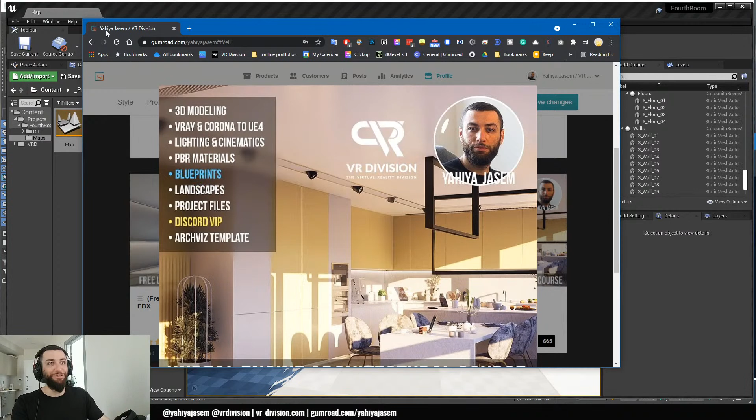Now that's it, let's close this and let's do our awesome stuff today. Thank you, Madizine, I appreciate you, all of you guys. Welcome, welcome Habibi, so let's get started.

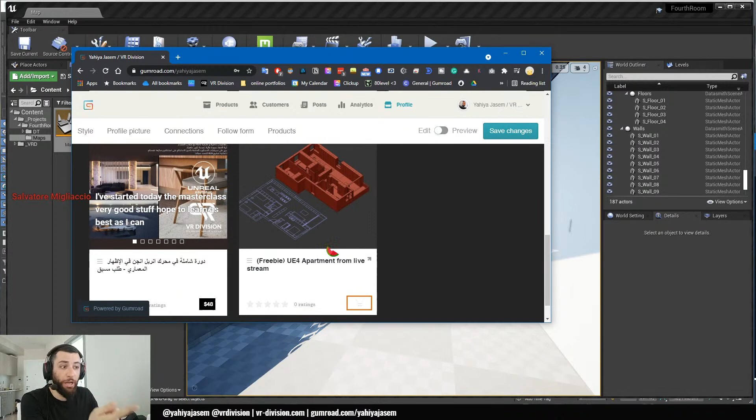Alright, once you download it, let's go back here. Once you download it, you will be welcomed with this. I deleted everything to make it a super small project file so we can get started.

Ray tracing is enabled because we're going to use the GPU Lightmass now. However, I would like to turn off all the ray tracing features in my viewport. To do that, click on the tilde key and type r.raytracing.forceall, force all ray tracing effects - you don't have to write all of it, just use your arrow keys and it will help autocomplete. So type ray tracing dot force all ray tracing effects, space, 0, hit enter, and now we've turned off all the ray tracing features in the viewport.

It would be much better to build the light this way, and actually I think Epic recommends that we turn off all the ray tracing features when we use the GPU Lightmass. Now when you click here next to build, you will find the GPU Lightmass, and it's enabled by default. You should have an RTX enabled card or something similar.

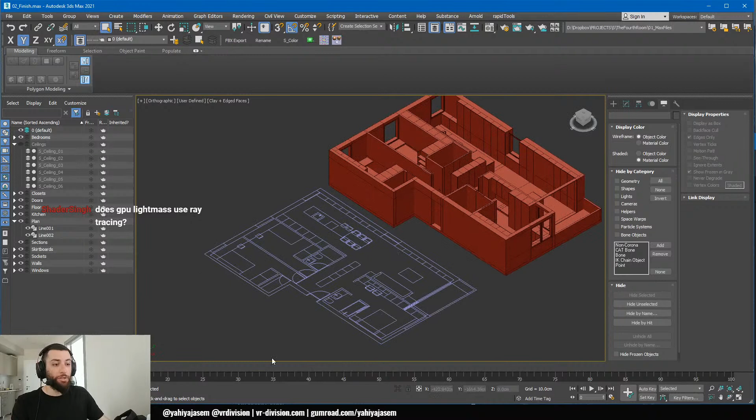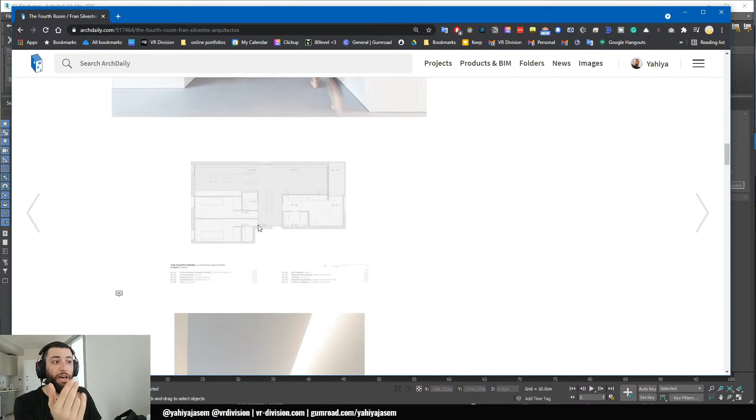T.S. John, what software do you use to make the house models? I use 3ds Max. Looking at the reference pictures on Archdaily, the way I started this project, I found this lovely apartment that I immediately fell in love with. As you can see, it's so beautiful here. Archdaily, one of my favorite features about it, is the pictures they provide, and if you're lucky, in 99% of the projects there are also the floor plans.

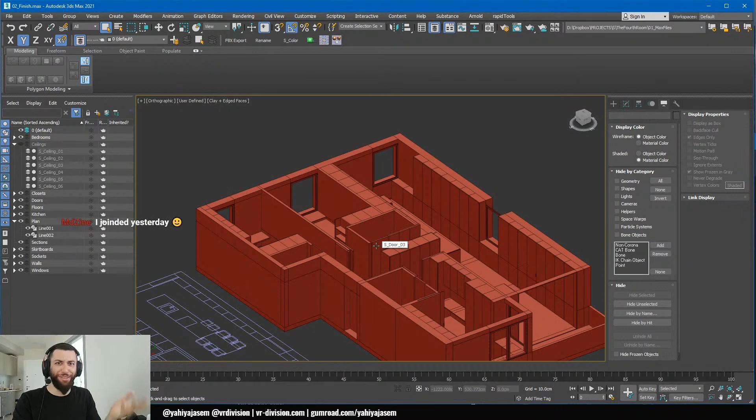Zahi from the team, he's an AutoCAD expert. I told him, hey Zahi, could you please do the drawings for me? He did, and then here we are. So I use 3ds Max mainly. I started learning Blender recently, well, it's been a year now, but mainly 3ds Max. But you can use any software you like, because there is an FBX file I provided as well if you'd like to edit anything.

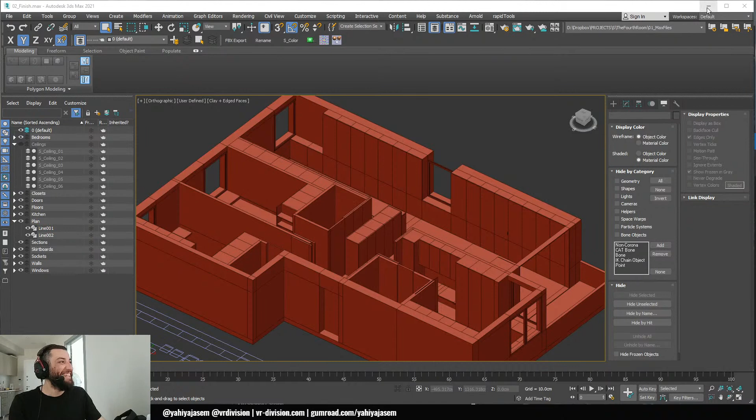Kishitij, yeah, I need to practice my pronunciation more, but as they say in Turkish, yavaş yavaş, step by step, or stuff like that. Or as we say in Arabic, shway shway.

When I start any 3D project, while I'm doing the 3D modeling, I spend really good time looking at all the reference pictures provided to understand what's going on, especially on personal projects, because I have more time to play with, you know, it's fun. I love this. So I make a mood board using a software called PureRef. Go to pureref.com, go get it, amazing little piece of software. I like to disconnect the internet and look at everything here.

Once we finished the 3D modeling, I exported everything with Datasmith to Unreal Engine, and in Unreal Engine, where you at? Unreal, wow, look at that, so many windows. Let's close some stuff, let's close this, go away, go away. Unreal, yeah, there we go. Exported everything with Datasmith to Unreal Engine, usually just a few clicks, and here we are.

Now again, once you open the project, type tilde to open the command panel. r.raytracing.force all ray tracing effects, space 0, to turn off all ray tracing effects. I think there was a question on ray tracing: for GPU Lightmass in Unreal Engine 4.26, you need to enable ray tracing for the GPU Lightmass to work. If ray tracing is not enabled, this button will be grayed out. However, the reason I provided the FBX for you guys, if you would like to use GPU Lightmass in Unreal Engine 4.27, you can also do that, where you don't have to enable ray tracing.

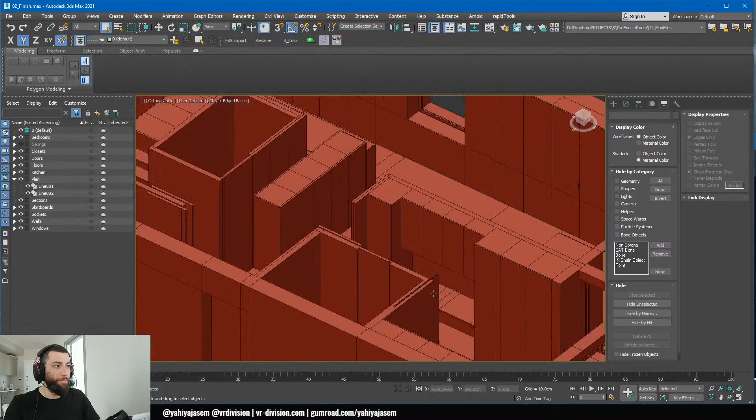One thing you need to know about my scene: I'm using a UVW mapping of 1 meter by 1 meter by 1 meter. So when I export my meshes, I apply UVW box like this, and 100, 100, 100. Many of the textures by Quixel are 2 meters by 2 meters. When you open Quixel Bridge, you can see the dimensions of the texture here. Alright, so it's 2 meters by 2 meters.

This means to see this texture correctly on our surface, we need to go to where it says tiling, and instead of 1 by 1, we need to put it 0.5 by 0.5. Scale it up a little so it can have the correct tiling here. And that should be good. Click save.

Let's also add a sphere reflection capture for now, so we have slightly more natural reflections. From place actors, go to visual effects, go to sphere reflection capture, drag it to your scene, and let's scale it down a little. So let's do 1000. Yeah, 1000 is not bad.

This time let's try box reflection capture. So let's put it here. Let's put it here, and I'm going to reduce these as low as possible so we can bake the light in the fastest time possible, and make sure all my static meshes have low light map resolution.

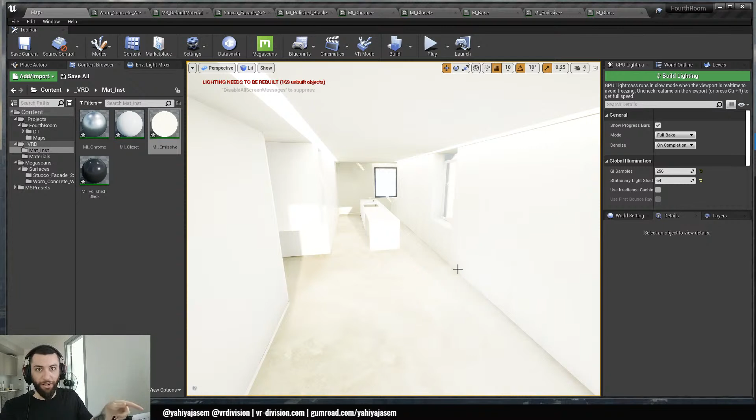That is perhaps still bright, but what we can do now is hold Ctrl L and move your mouse. When you hold Ctrl L and move your mouse in all directions, it's gonna be so hard to control the sunlight. However, when you hold Ctrl L and move your mouse only left or right, or up or down, it becomes way easier to control your sun. So don't move it like crazy in all directions - no rotating.

Let's reduce the emissive to 2 perhaps, and let's now build the light.

Hey Dead Skull, welcome back! I saw your stories on Instagram - that's an amazing place. All I could imagine is what are you going to create after that trip - another Quixel movie or something similar to Rebirth? It's so good, these mountains.

Yeah, I what? You wanna say hi, guys? Say hello. He changed his mind.

Okay let's go, now the scene is too bright, and I think it also has to do with the exposure - the post-process volume.

Dead Skull, my man, welcome back. Yeah, the exposure here is way too high, so let's set it to 2 - yeah, 2 is fine.

Now we're talking, so now we can increase it. You see the massive difference?

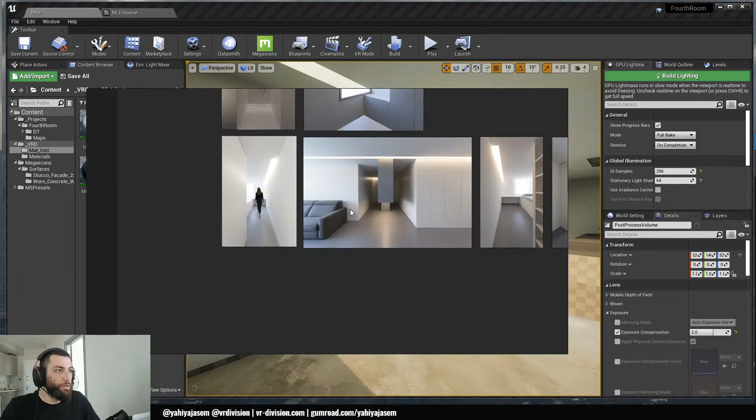Let's see if we can do something similar to this. Regarding the material, it's honestly easier if we just set this to something like 1, so we get the effect of it glowing.

For now, we should improve on this. Let's go to Place Actors, Lights, and drag a rectangular light. Press G to toggle game mode. Let's delete the barn door length.

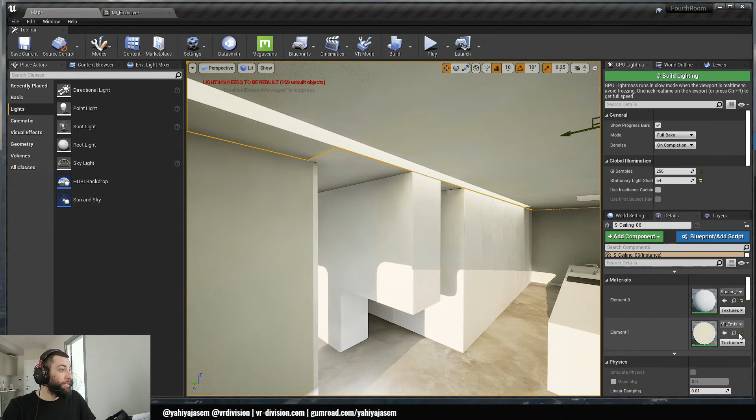Dead Skull, where are you using the emission texture? I just joined. Yes, we made it actually real quick.

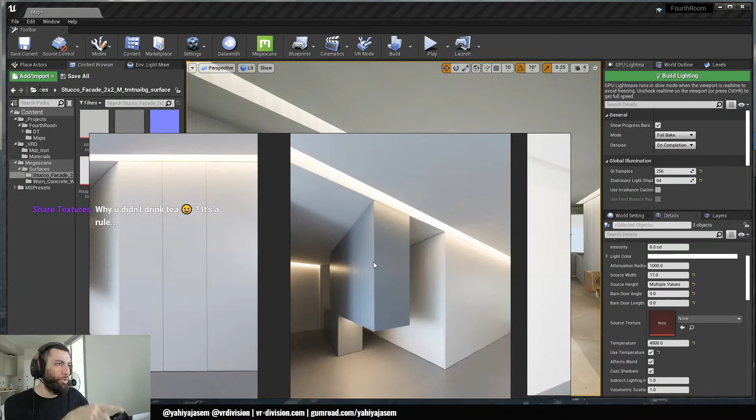We also need to select our lights and set the temperature to something like 4500. This is a good time to look at our references. This is a very warm light, could be like 4500 or 4000, and the intensity, let's set it to the middle, 5. Let's increase the light map resolution of our floor to something like 512 so it can catch better shadows. Let's make a duplicate of this closet material and call it MI dark blue or something. What color is this? This is not dark blue, let's try to...

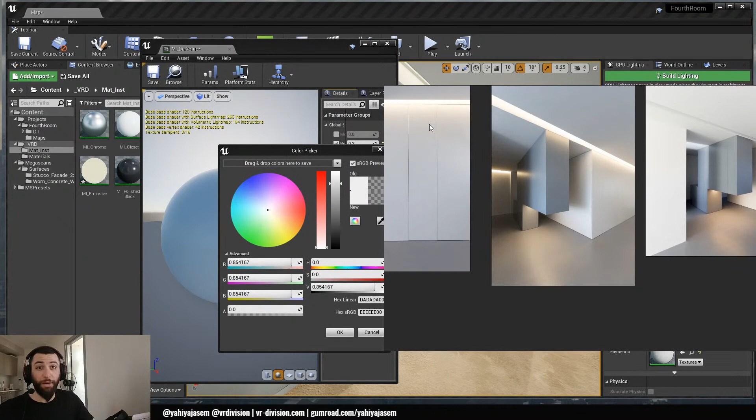One thing - every time I go back to Unreal Engine, my reference is gone. What you can do is right click and there's an option to keep PureRef on top. Ctrl Shift A is the shortcut, keep on top. So now, there we go. We can simply try and sample color from here to start with, and let's make it lighter. Save, so it's not dark blue. No problem, Ctrl Shift A again, and let's do this and this.

How did we forget to assign the material on the floor here as well? So now we're good. We can make a duplicate of this guy. Let's select all of these static rectangular lights, set them to static, and set the source height to like 50.

Alright, I'm glad I answered your question, Salvatore.

Leonardo, for glass in Unreal Engine, is it better to use a simple plane with two-sided material or use a thin cube? Just use a plane. In this project, we don't go outside, we're only inside the apartment, so what I do is have a glass like this plane. It's just one simple plane, no need for two-sided material unless you want - actually that's a good question. Now we can try to see how the translucent shadows will work. However, my problem with translucent shadows is that with GPU Lightmass, they're not supported, so that's the problem with them. If you want translucent shadows, you have to use the CPU Lightmass. I'll keep it like this. The two-sided material is exactly as you said - if you go outside to inside, you can enable the two-sided option and you should be good.

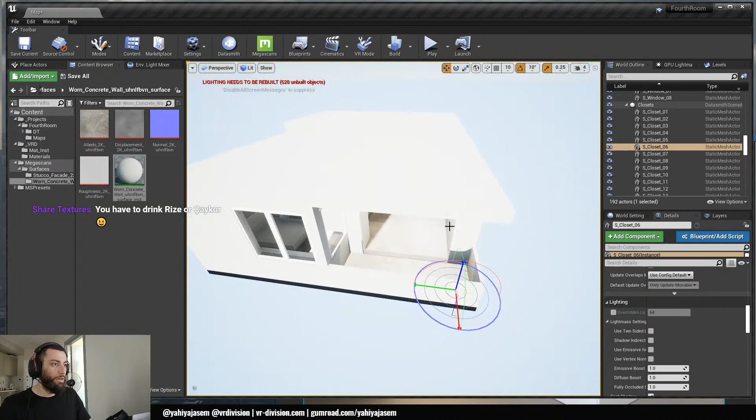Let's make it similar to the reference. So in the reference, do we have any sun entering at all? No, it's coming like this. So let's say, oh shit.

And now let's click build light again.

Modeling for games and for Archviz are extremely different from each other.

You have to drink Rize or Çaykur. I will take a text note of that, Tulga, and try it. So now I'm drinking Doğadan something.

Hey Navid, things are going great, thank you. How about you? Tulga, how do you rotate the sun like that? I missed the point, no worries. Chris got you, Harshid got you. I will just give you a quick tip on this.

So, oh look at that—the first error with the GPU Lightmass in Unreal Engine 4.26. I wish I knew what is causing this, but I have no idea.

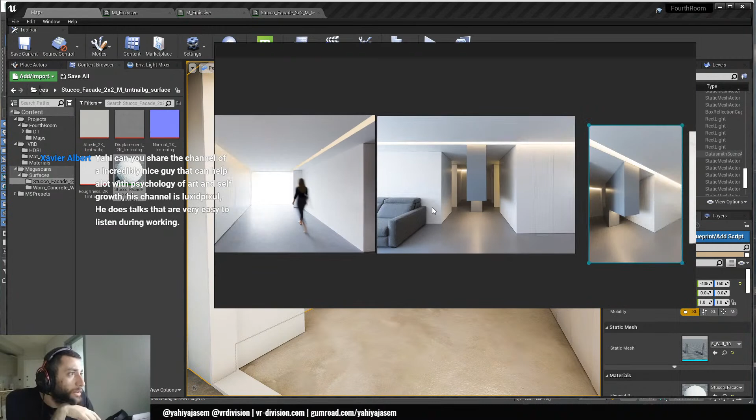So what we need to do then, from the albedo control, we can increase the brightness of this a little bit, or we can find a different material. That's one thing we can do. Number two is actually selecting a similar light. If we look here, our materials are really close to white. And what about our texture, the closet textures?

Xavier, can you share the channel of the incredibly nice guy that can help a lot with psychology of art and self-growth? His channel is luxidpixel, he does talks that are very easy to listen to during work. Of course, I won't share everything unless I know the guy. Is this Xavier here? Adam Duff? Why it's so hard to sit down and draw - that's a good title for a video, or why it's so hard to sit down and work on your Unreal Engine projects. I will definitely check this out, Xavier, thank you for sharing. Guys, Xavier is one of my best friends, I trust everything he says, so if he recommends this channel, I would check it out.

Smoking Panda, how are you? Good to see you buddy, long time no see. Iftar over here, I'll have to wash. Okay, finish your food and come back. Thank you for sharing, Xavier, I'm going to check that out too.

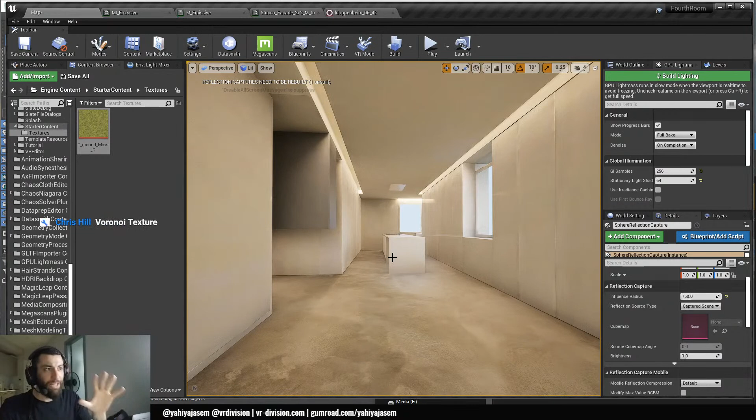I don't know, by the way, if you guys see what I'm seeing, but it's just the night mode on my computer, it's extremely yellow. Give me a second to disable the night mode. Wow, oh my god, yeah this looks good. The night mode made my image look completely super yellow, and I was like, why?

No, not Voronoi texture, Chris. There's a noise, it's in the starter content, let me find that real quick for us. I can steal it from one of the other projects, you'll remember what I mean guys. Give me a sec, so this is one of the projects. If we go to content, to starter content, to where it says textures... where is that? Unless I copied it somewhere. So let's open this project real quick, so I can steal some textures from it.

Okay, I would perhaps try and increase... so right now I'm using the skylight with a cube map on it. Shader sync asks: when lighting an interior apart from directional light, do you put rectangular light facing inwards at the window? No, there's no need, we used to do this to fake area shadows and whatnot, you can still do that, but for me, no. I'm just having a skylight at the moment - only the skylight is contributing to the lighting in my scene, plus these lights here. And I was thinking it's perhaps not a bad idea to enable the directional light again, so let's enable it.

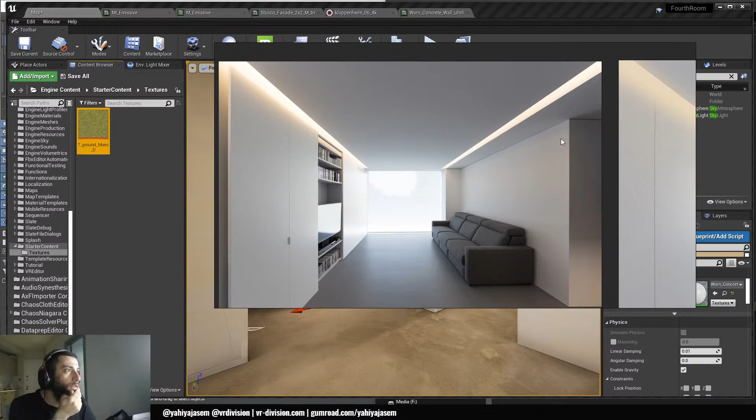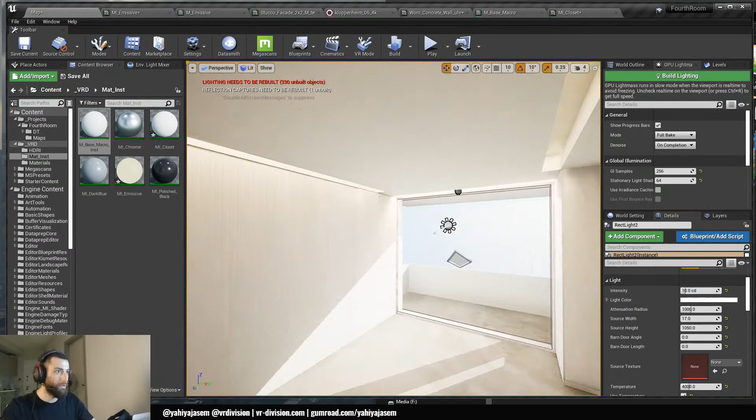Yeah, this is nice, and let's increase perhaps the intensity a little bit. And I will increase the intensity here as well. So let's make this 10. 10. And this here is way too bright.

Something you need to know about the intensity: when you have a light like this, its source height is 10 meters. And another light, where the source height, let's say, is 1 meter, you need to set the intensity from 10 to 1, so they can share the same effect. So when you increase this a lot, like make it much bigger, like this, you see the light will just become dimmer and dimmer. So sometimes you need to increase the intensity for that.

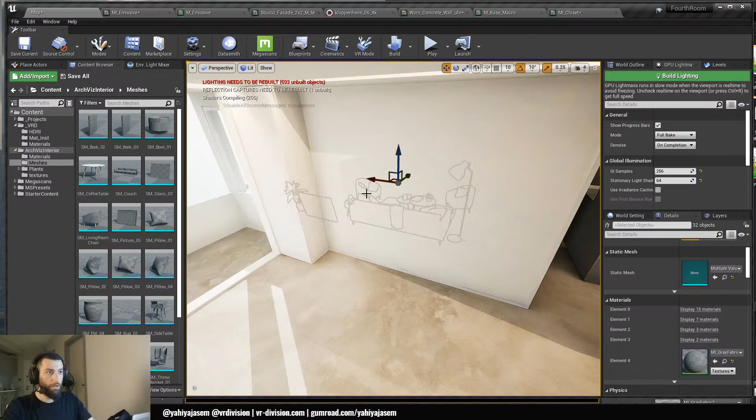So obviously we have two different projects, we need to set these correctly. I'm just going to press Ctrl G to group them together, so if I deselect it can be easier to select all of them.

And I will switch to unlit so I can see what's going on faster because it's compiling shaders. I will select the floor and the wall, press visibility, show only selected - I have a shortcut for that, H. So to isolate my selection again, rotate, go to tab, and there we go.

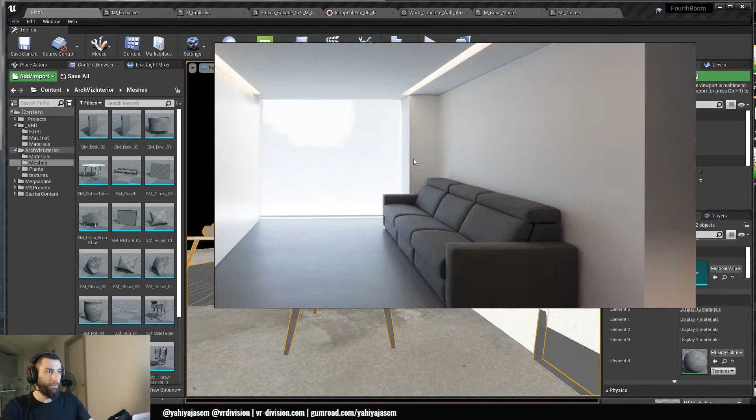Of course, if you would like to take this one step further and do the modeling of this sofa that you can find in the description - if anyone would like to model the sofa and send it over, please do, no problem, I won't say no to that, you can do that. But we don't have time for that today, and I am rusty in 3D modeling, so let's just do this.

Or you can actually hold End on the keyboard and it will snap. Now we are good, so let's do this.

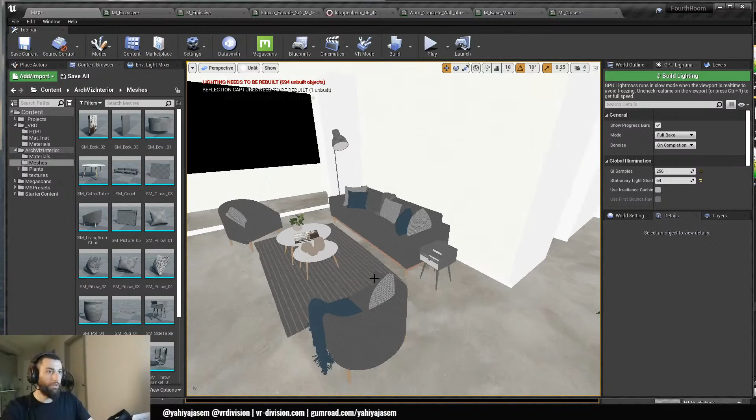So to bring these back again, let's switch back to our project, find this wood, click asset, migrate, don't save, save it, don't override, so it can copy faster. And I can go back to my project and just copy and paste the name of that wood.

It was element 1, right? Yes. And we also have steel dark - asset, migrate, don't save, yes, yes, and steel dark. And we can do the same for the rest of the assets here.

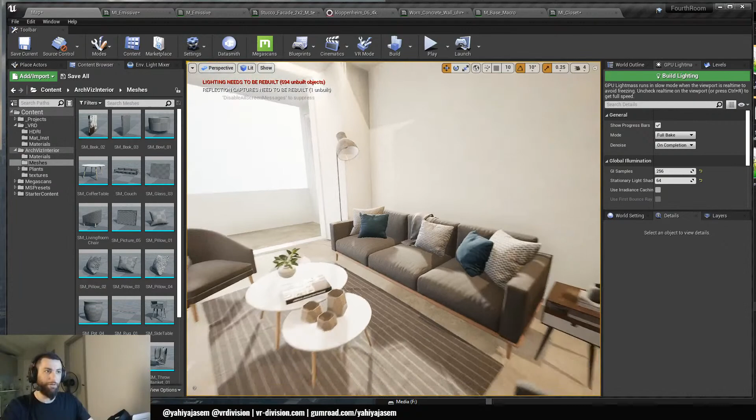Regarding the lamp, it seems that we forgot to copy the light here. But I don't want the lamp - do we want the lamp? I mean, it's cool, let's keep the lamp, yes.

So let's copy that light, Ctrl C, Ctrl V. It didn't copy, I think - it's not copying, how? Sometimes you need to press Ctrl C multiple times for it to copy. Yeah, now it did, you can check. Ctrl V now, there is our light.

So we can bring this light and place it here, then move this wherever we like. So in this case, let's select the sofa again and the rest of the guys here, and move them slightly to the right. Why not?

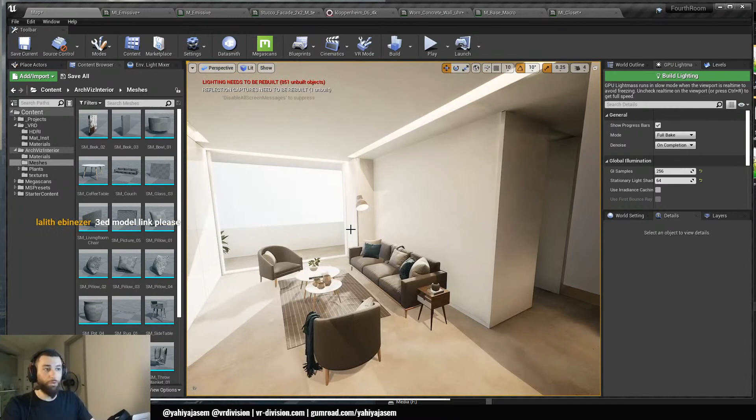If you would like to have the ability to interact with your projects, feel free to ask - I'm gonna show you, and I'm gonna make another ad for the masterclass. So I will show you what blueprints look like.

So I think it was MCV version 6, yes, because I would like also to copy some assets from this project and place them here in the kitchen. I'm gonna save.

And do we need to steal anything from here before we close this project? We could take the chairs.

So you don't have to start with blueprints. To start, it depends on how long you have been working in architecture. If you're very good in other softwares like 3ds Max, Blender, or Cinema 4D, that's good. If not, I would focus on learning these 3D tools so I can create content for Unreal Engine. And in Unreal Engine, I would focus first on learning how to light my projects, which is the most essential and most important thing. Bad lighting - it does not matter how good your assets are, how great your materials are, your project will suck. So learn lighting first. Once you do that, you can focus on learning materials, cameras, and everything else.

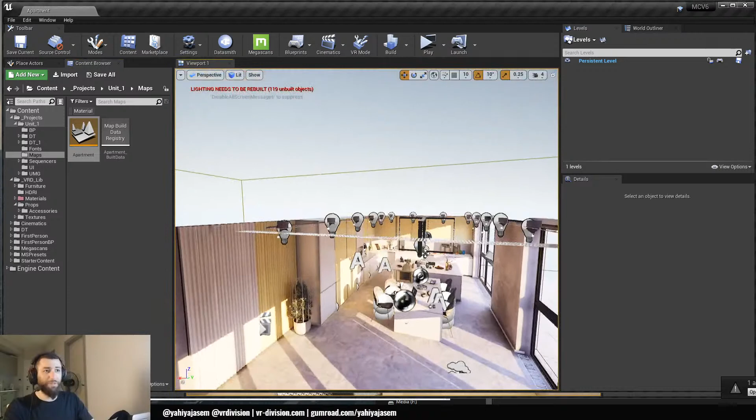But mainly when you render with the hybrid method, most of the time you won't have flickering if you're working with projects like this. For me, I never suffered from flickering. I know people are suffering from flickering, but it's just a matter of increasing some settings and then you should be good.

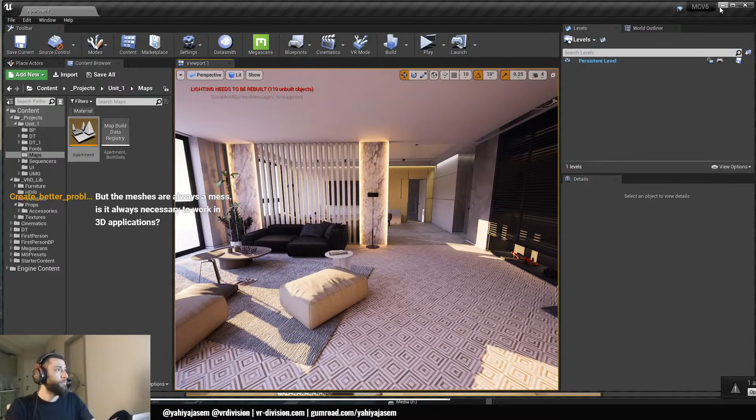So everyone here, this is the apartment we're making for our masterclass. It's actually one of the things we teach people how to do. We started this project from scratch.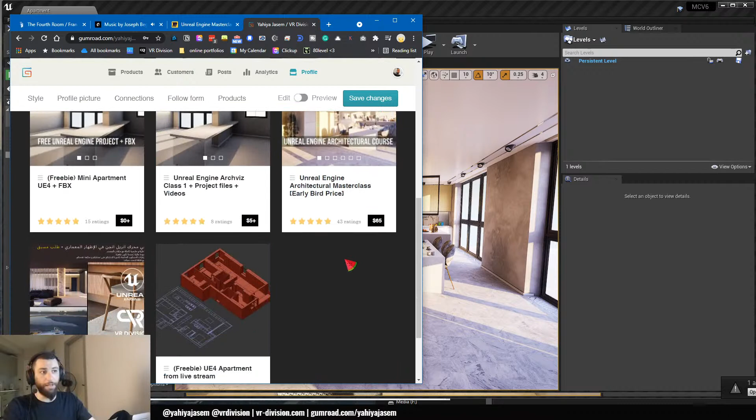So this project here, blueprints, let me make sure they are enabled... there we go, so they're not. So here's a blueprint for the level. This is a way of telling the engine, hey, when I start playing the game, please play a movie sequencer for me, a cinematic, and activate some stuff. And in the world settings, let's also do this. Now let's hit play, let's see what happens.

So what are blueprints? There we go. When I first play my project, there is a cinematic. I'll show you how to create the cinematic, how to create this user interface and all these animations.

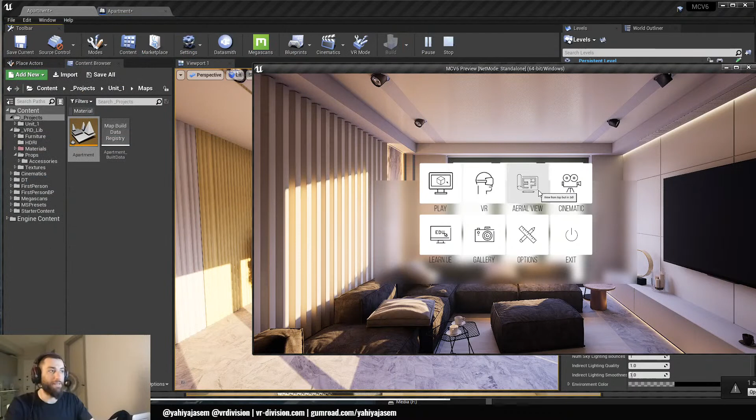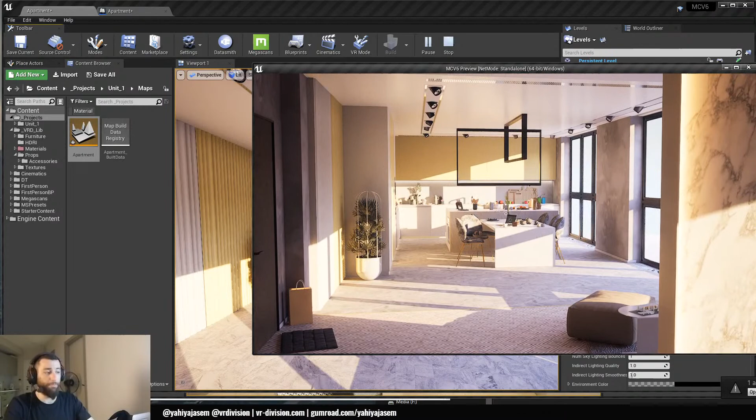But when we hit play, for example, you see the smoothness in the mouse, or how I move my camera. That's one of the things we teach, or that's one of the things you can do in Blueprint. If you right click, for example, that's one of the things I did to zoom a little bit. What else?

I have 3 Unreal Engine projects open, there's some frame drops.

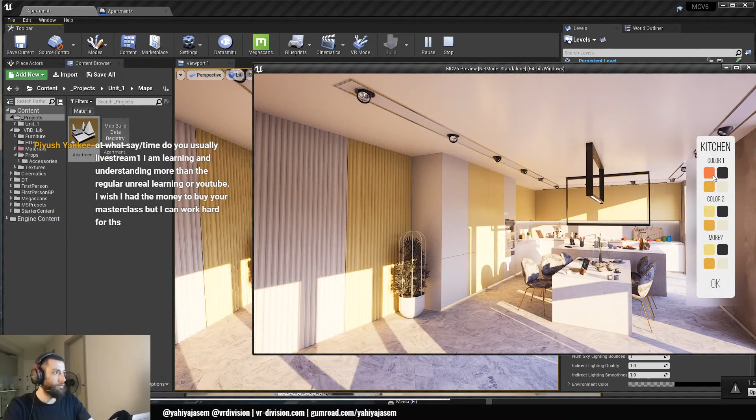So we can change colors, so that's that. Can change materials. And there is a highlight material that is supposed to work, but I don't know why it's not working. Let me check real quick... post-process volume, and in the post-process materials.

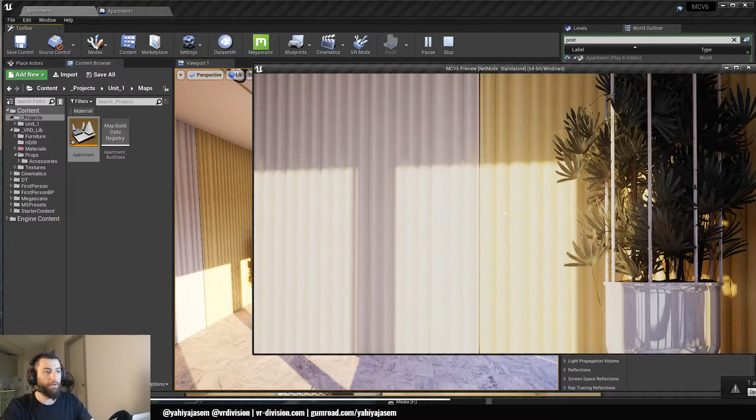Well, no problem. This is the first apartment we do in the masterclass, and then there is another really nice big project that we cover much more when it comes to large-scale projects inside of Unreal Engine.

Yeah, I think I messed up something with the project, there are some missing textures and whatnot.

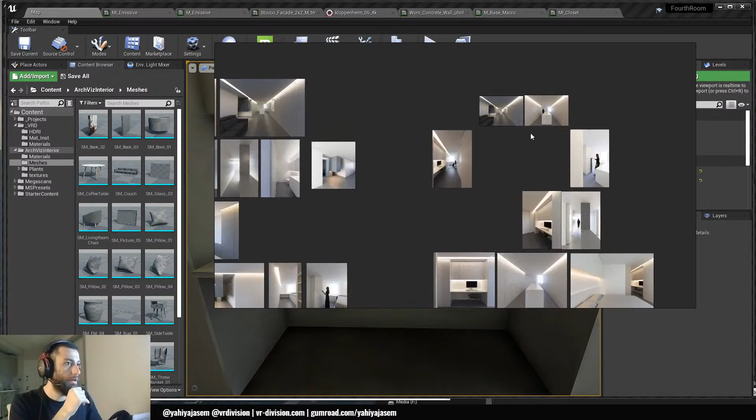I hope this answers your question.

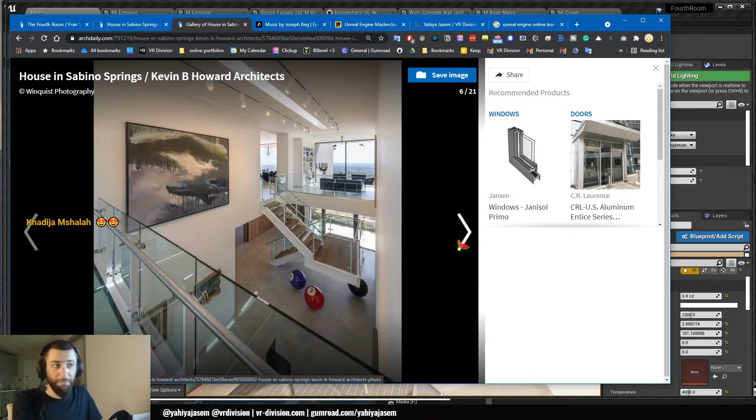And regarding the house, May, there is this future project, it's also planned, coming soon. We fell in love with this - this morning we were talking, hey, we need to do something exterior. This could be one of the upcoming projects we will try to recreate inside Unreal Engine. There are already many of these assets within the Quixel Megascans ecosystem, and landscapes are my passion. This house is sick, so this could be one of the upcoming tutorial projects we'd like to recreate.

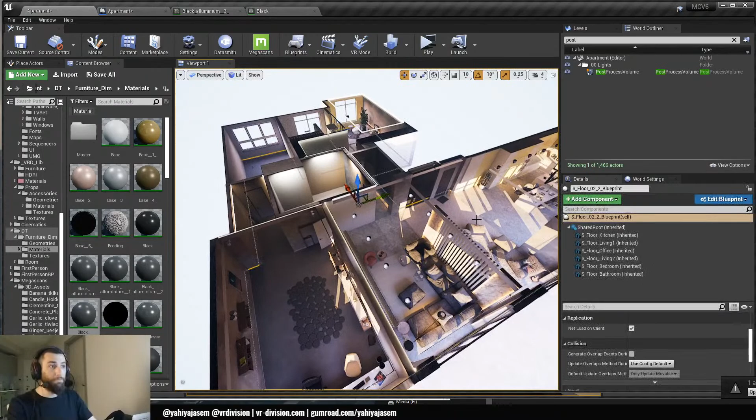Not to mention that this apartment can also be played in VR, and it looks so good in VR. Cinematics, pictures - we can always go up like this, the ability to visualize everything in real time. That's what killed V-Ray and Corona for me.

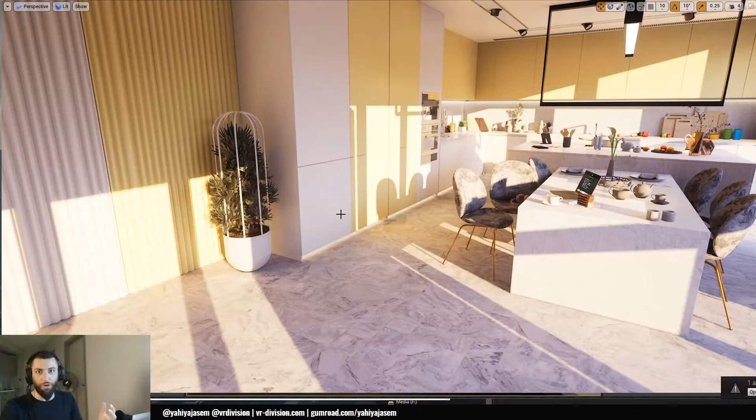Yes, it's so much easier to create pictures with V-Ray and Corona, much more realistic pictures. But sometimes it's not the goal to create super realistic pictures. This is still kind of realistic, it's not super realistic, it could be better, but the ability of walking inside this apartment, interacting with it, turning lights on and off - that's what, man, why I work with Unreal Engine every day, and I try to improve to achieve what people can achieve in Corona and V-Ray. So I hope this answers your question.

Zubair, I have a very similar sofa model close to a reference, can I send it to this sofa from the fourth apartment? If yes, please send it to me on Discord, I would love to have it here instead of the one we stole from the marketplace. Yeah, this one is ugly, this one is so cool, I would love to sleep on this one.

So, people from South Africa, Brazil, Italy, Serbia, Colombia, Chicago, India - amazing guys, wow, UK. Data Smith makes me mad sometimes.

Mr. Mean, yes, Data Smith makes me mad too. It is what it is, but as long as it's saving us so much time, then that's great.

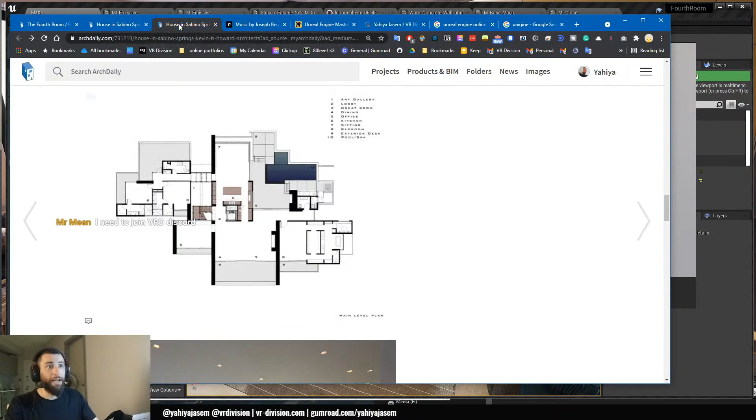Can I use your free apartment model? Yeah, of course. Regarding this apartment, it's only for learning purposes because it's by the guys from Kevin B. Howard Architects. However, there is this other apartment that I created from pictures on the internet and modified a little, you can use this for whatever you like, including commercial use. Feel free to change it. There's also the FBX if you want to make it bigger or smaller, I'd actually encourage doing that so you can end up with a portfolio piece on your Artstation.

Artstation, by the way, if anyone is having this problem, I subscribed with a plus and I keep getting this error here, which is kind of embarrassing, but it is what it is.

The ultimate goal, guys, is learn something, do something, and work on your Artstation portfolio. Always share something on your portfolio, this will get you discovered, this will get you opportunities, this will get you jobs. Every time I share something on Artstation, we get jobs.

I'm glad you asked me. Rohsan, hello, Khadija, hello again.

MV, my man, dude, I did Loft with Love in Unreal Engine as a practice project. Really? MV, can you share a link if you have anything on your portfolio? Loft with Love is a very, very nice one, I'm glad we share the same taste, buddy. So where is it? Lofts, apartments, where is it? Loft with Love, I love this apartment, this loft here, that's a great practice project. This is a good one, MV. This is one of the upcoming tutorials soon, guys, so we will be making this loft as well.

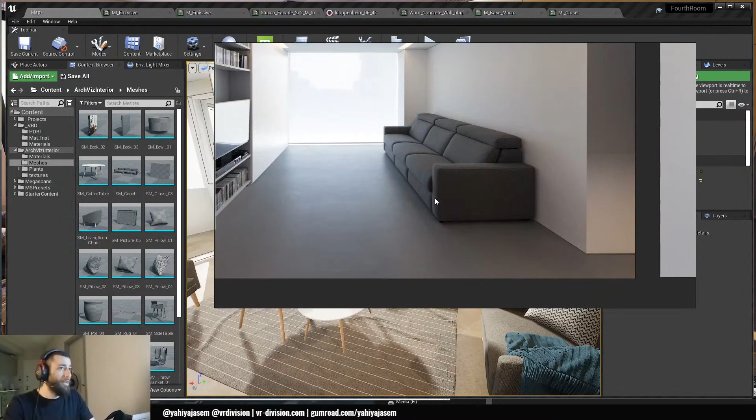I think it's time to stop soon, so I'm sorry, I was talking a lot. Let's click build light, see where we're at now. Let's do the final session here before we close Q&A, so if you have any questions about what we've done today, please feel free to ask. And don't forget to download this apartment and apply everything you learned on it.

Are you still working on Corona, V-Ray, or other renderers, or entirely using Unreal? I am entirely using Unreal Engine. I would still love to, actually I'm working with Blender cycles, I'm learning Blender, it's fun. With Blender I do stuff if you'd like. Speaking of Artstation, here's a link, follow me, these are rendered with cycles. I like to render planets sometimes with Blender. This is the last project I did a year ago on Corona, I was just having fun with it. I still use it from time to time just for fun, but I think this was the last time I used Corona, about a year ago, for practice, something that was not architecture.

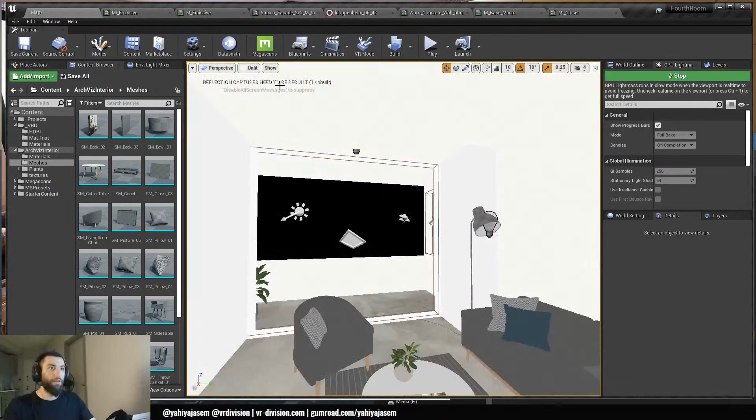Biosh Yanke asks, what modes are the lights, static, stationary or movable? Everything is static. The sun is stationary, and the rest of the lights are static.

When using the GPU Lightmass, make sure your skylight is also static, or you will get some very weird skylight. Once I upgrade my GPU, right now I'm running a 1080 Ti, I would love to make dynamic lighting tutorials.

For now, we can make dynamic lighting tutorials on exterior projects, something like this. This is a tutorial I'm working on. Let me show you the cool stuff before we close, guys.

For how many hours has it been? I don't know. I'm kinda curious. Wow, 3 hours, is it? Interesting, I never felt the time, guys.

Let me show you this project, guys. It's based on Leon Tukker, one of my heroes. Concept art, futuristic city. Tutorials are coming soon. So now it's taking more time to build the light because our scene is getting heavier.

I hope the stream quality is not that bad because of the light bake. I'm kinda crazy, I should not open all of these projects in Unreal. So let me close this. Let me close this.

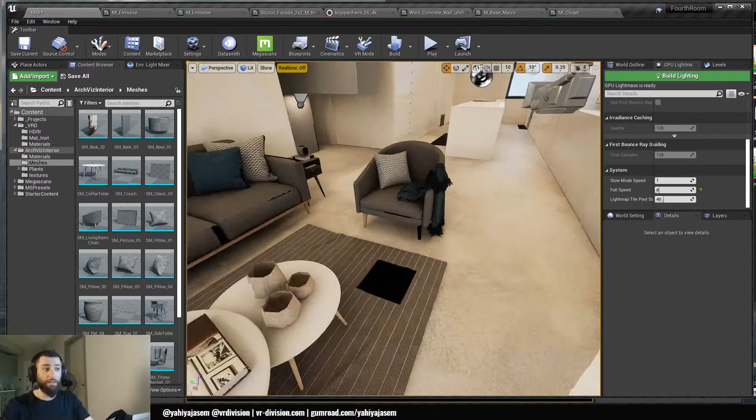Question: you think Unreal Engine does not produce static realistic rendering like... Oh, it does. Unreal Engine produces amazing images, it's just you need to know how to produce them. You can compare Unreal Engine to V-Ray and Corona at this point, especially with the new methods in baking the light. Since the GPU Lightmass, it does. With a CPU Lightmass it's very hard, but with the GPU Lightmass in Unreal 426, 100% possible. As you can see now with the current GPU Lightmass in Unreal Engine 426, there are some bugs.

Some of these bugs are these black boxes that come out of nowhere. I did a test during this stream, I will do it again after the stream. It could be because of the directional light, it's doing something. Before, I disabled the directional light and these were gone. So I will try that again, let you know. Actually, we can try that now.

Select all descendants, I'm gonna press Ctrl X on all of these guys and save them in a text document so it would take less time to build the light. I will delete this and delete this. And now you see these black boxes coming out of nowhere. This is one of the bugs currently in the GPU Lightmass in 426.

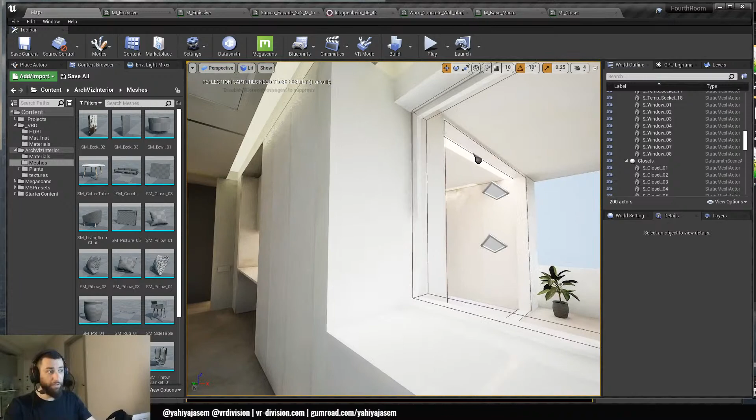This is why I keep advising people, hey, if you are using Unreal Engine or working on an Archviz project for production, meaning you have a deadline and a delivery date and whatnot, stick with Unreal Engine 425 for now because you cannot deliver this to your customer yet. So now I disabled the directional light, let's see if these guys will stay here or go away. Let's build the light again.

Okay, stop. Affect World. Build. You can see it. Well, once it finishes, then we will have this error again. So I'm gonna disable it and let's click build.